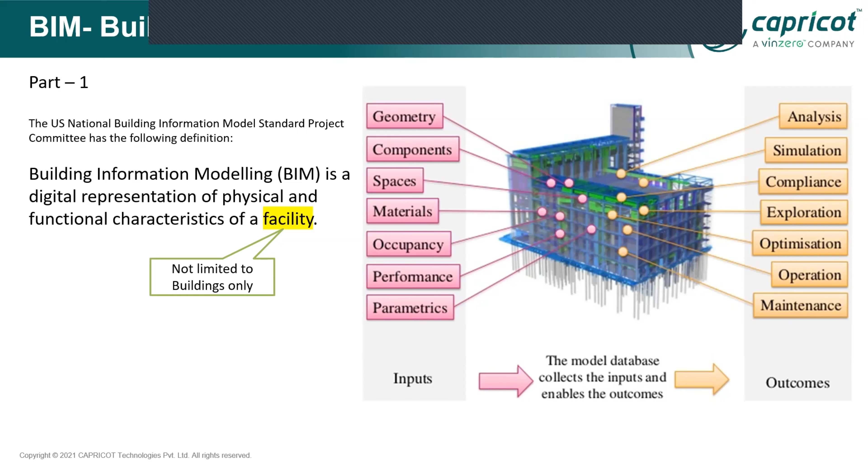Apart from that, I would like to have one more definition. BIM is a shared knowledge resource. We are not building any construction or simulating any construction - we're actually building the information, from the programming stage till the renovation and demolition stage. We are completely building the information.

So from the programming stage, whenever I'm in the idea generation stage, I'll get the information and simulate to create a conceptual design. Right now I have a conceptual design model, so when I go to detailed design, I require the conceptual design data.

In current industry, when you go to detailed design, let's suppose we have a conceptual design model ready with us. When you go and ask your seniors to share information, they share some old data, or they may lose it because they are collaborating using WhatsApp or Gmail or some other platform. There is no standard cloud model from where we can exchange the information.

If you are working in a BIM environment, you have a common cloud database from where, from concept to demolition, renovation, or operation and maintenance, everyone will be on the same pitch, on a connected pitch, so you can exchange information from start to end.

For example, at any point if you want to extract particular information, you can do so by comparing different version drawings. There is version control available in building information modeling. You can extract older version drawings and compare current version drawings with the conceptual design versions.

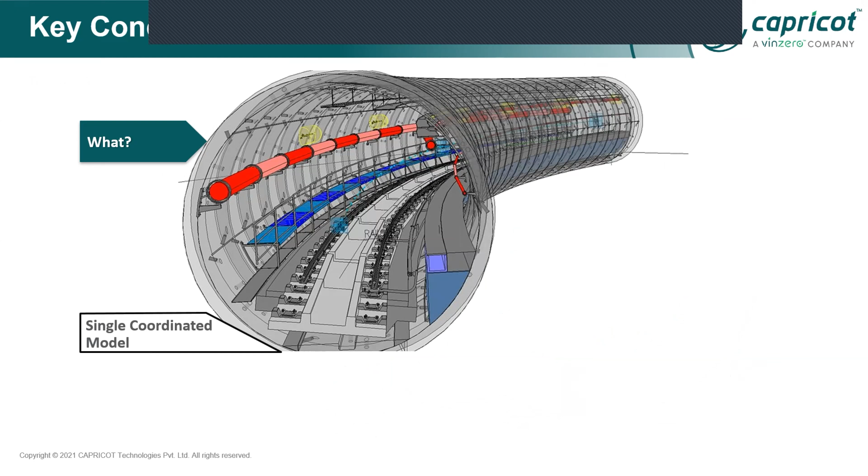It will allow multiple design firms to collaborate in a single source database. Who can collaborate? Designers, engineers, contractors, official people, or external consultants. Everyone can collaborate on a single coordinated model, because we have a single source database providing a single coordinated model.

So now we have a single coordinated model. A designer can work on that particular project, a contractor can also work on it, and a project management team can also work on that particular project.

If at any point a project management team faces an issue at the site, because we have a digital representation model ready with us, they can raise the issue to a designer. Now the designer, sitting in the office, can resolve that issue and publish the latest updated drawings to the site without using any paper, as we talk about sustainability factors. Without paper, I can do the work and collaborate in a cloud manner.

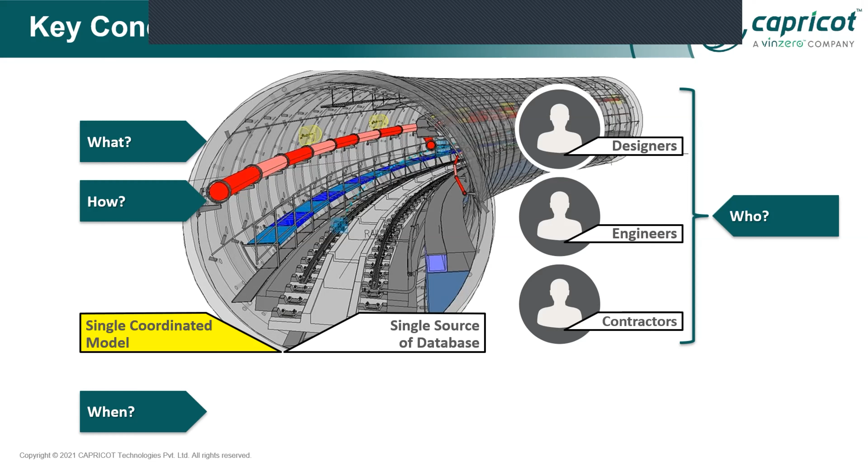So from where to where, or when does building information modeling help you? From concept design to construction and operation phase, we are on the same pitch. The entire building information model will help you achieve your organization's goals.

Apart from that, I've added a couple of snapshots to show you it's not only limited to buildings. Most organizations in India or in the world working on road transportation projects are using building information modeling.

If I take an example of products like InfraWorks and Civil 3D, those are BIM oriented tools which will help you achieve your BIM objectives. Apart from that, this can also be used for rail corridor projects.

And we have water infrastructure projects. I haven't added hydroelectric projects, but BIM can also be utilized there as well.

If you are from the hydroelectric background, using Revit, Civil 3D and InfraWorks, you can construct an entire digital representation of the hydroelectric project on your systems, and then finally publish your drawings to the field. That is also possible.

So I mean to say, BIM is not only limited to buildings. It can be used for any industry. If I want to brief you further, BIM is a concept where multiple organizations' people can work on a common data environment, represent a digital representation model, and fulfill their objectives, or BIM objectives.

So I hope I've covered enough about BIM. I'll skip to the agenda of the session. In this video demonstration, I'll switch to InfraWorks and show you the basic road design workflow for preliminary level. In this webinar, we'll focus more on preliminary design of road.

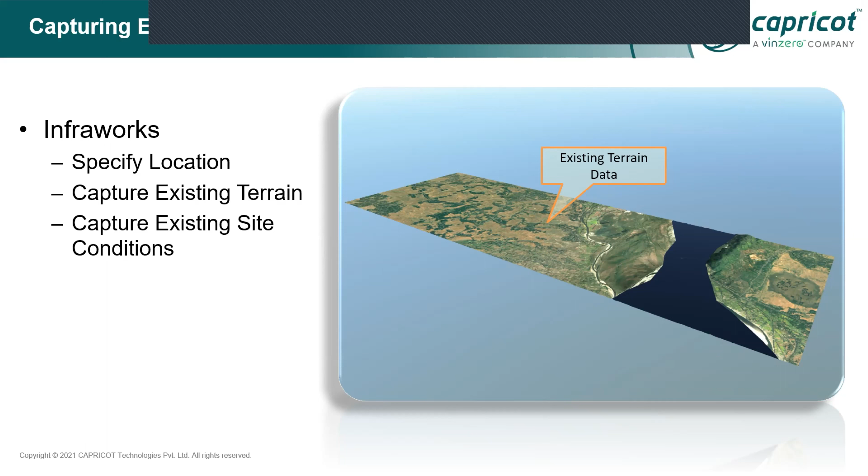In this particular picture on the right hand side, you can see I have captured one particular site with its existing terrain data. This data has been captured by InfraWorks from US satellite servers, with Autodesk having a direct integration with Microsoft Bing Map, capturing data from the US satellite servers. You get an entire 3D contour elevation data ready with you, overlaid with a Bing Map image.

Apart from that, we also get existing facility information like rivers or roads and alignments, captured from OpenStreetMap. Now we have contour data and existing facility data, so I can simulate, and the designer can work in a 3D environment and relate the information better. Due to the high level of resolution we have, I can work in an easier environment compared to 2D AutoCAD drawings or 2D Google Earth images.

I'll show you a live demonstration as well. We'll be talking more about data capturing and stuff. Apart from that, whatever information you have captured, you can extend to Civil 3D and do further modification on top of the terrain. For example, if I want to extract my contour map, or propose any surface, that can be done with the help of Civil 3D. We'll show you in this video demonstration how to exchange InfraWorks data to Civil 3D as well.

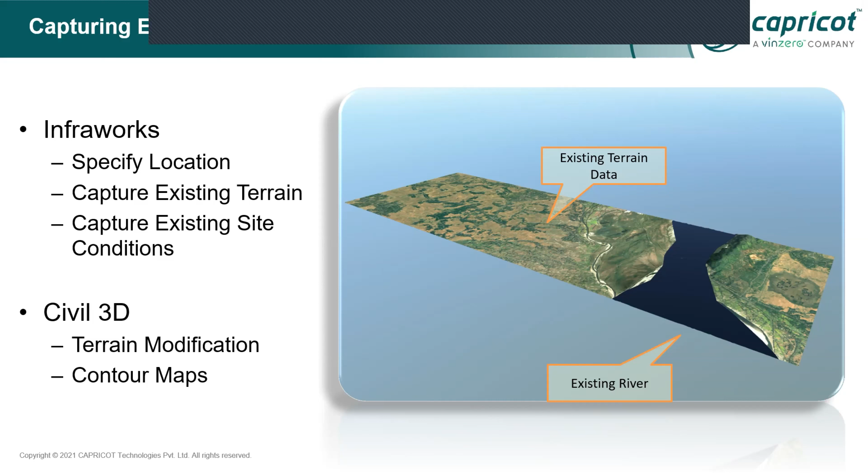So you can see in this picture, we try to capture an area which holds the existing road, and we have proposed a tunnel or railway tunnel, plus one more road tunnel for future traffic. Within InfraWorks, you can capture your existing road and rail conditions and information, and propose your road and rail layouts as well.

Once you're done with that, you can exchange complete information to Civil 3D for detailed assembly modeling, or extract quantities - quantity takeoff is also possible in InfraWorks, but you can do more detail in Civil 3D. If you want documentation like multiple cross sections or profile views, that can be done in Civil 3D in a very connected and dynamic manner. So once you are done with your complete model, you can exchange the complete information to Civil 3D as well.

Without wasting much time, I would like to switch to a live demonstration. I'll share my InfraWorks screen - just allow me a moment. I'll share my screen again. Yeah, I hope it's visible. I'll switch to InfraWorks now.

So this is the typical interface of InfraWorks. As I mentioned, InfraWorks is basically a conceptual oriented design software. On the top right corner - I won't go through the interface overview in detail.

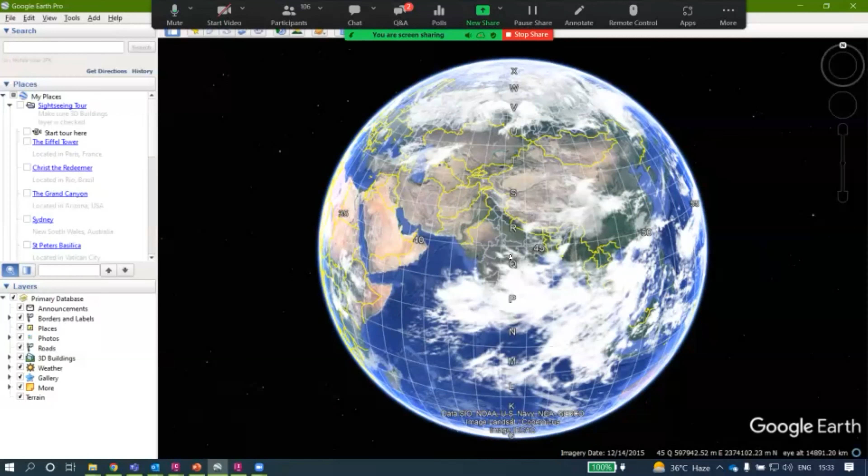Most of us refer to the UTM WGS 1984 coordinate system. In Google Earth you can see what UTM WGS 1984 actually is - we have a standard meridian, and according to that meridian the entire world has been divided into a number of grid pieces. Vertical grid lines are given a numerical value, and horizontal lines an alphabetical value. According to that we have 41, 42, 43, 44, 45, 46, and 47th strips.

India falls between the 42nd and 47th strip. So we are referring to UTM WGS 1984, and I'm concerned with which zone it's falling in - 42, 43, 44, 45, or 46 - that's something I'm defining there. Rather than using LL84 - which stands for latitude, longitude, UTM WGS 1984 datum - you can see this LL84 uses the WGS 84 datum. If you want to target any other particular country's standard coordinate system, you can click on none selected and specify the coordinate system you want to target.

As I mentioned, we have different types of zones as well. In Google Earth, you can see Navi Mumbai is somewhere over here - it was falling under the 43rd zone. So UTM WGS 1984, 43 zone, I need to define that. That is something available here as well - if you know the zone, you can define the zone directly.

If, like myself, I don't have Google Earth and I'm not sure where it was actually falling, I can specify LL84. When I specify LL84, it will target the UTM WGS 1984 coordinate system and it will use the zone as 43 north - the zone is calculated automatically. I'll select LL84, click OK, and now I'll click on create model.

When I click on create model, a model is going to be prepared in the cloud. You will get an email notification once it has been processed - it takes around 3 to 4 minutes depending on the project size and model size. Whoever has an Autodesk login will receive an email. Once your model has been processed it says success, your model has been created and is ready for use. You'll get this type of email, and your model will pop up on top of the InfraWorks screen, on the recent screen.

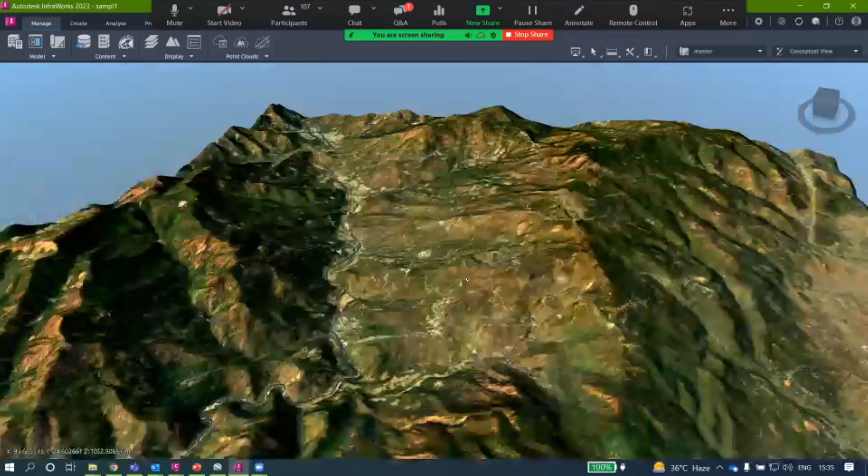Just to start, I'll open one of the sample projects I've captured. Rather than Navi Mumbai, I've also captured the Navi Mumbai site, but before that I want to open a hilly kind of area located somewhere in Manipur, just to show you the capabilities of InfraWorks. I'll open that now - you can see I tried to capture the area of Manipur, and I have complete hilly information here.

Compared to Google Earth, I have a more 3D based approach. You can see the hills that have been captured, the roads captured from OpenStreetMap, and the rivers, streets, and different types of features. I can capture and simulate the existing terrain conditions of that particular project location. If I switch from conceptual to engineering view, you can see the contour lines - I have many contour lines.

If I zoom into any region and hover over it, you can see the contour numerical value as well: 800, 900, 1000, 1100. When working in 2D base maps, you won't get this much information - you don't have this many contour lines, this kind of 3D approach. So at the preliminary design stage, I already have complete information ready to work with. This is more of a hilly region area - there's no population here, so it does not have any building representation.

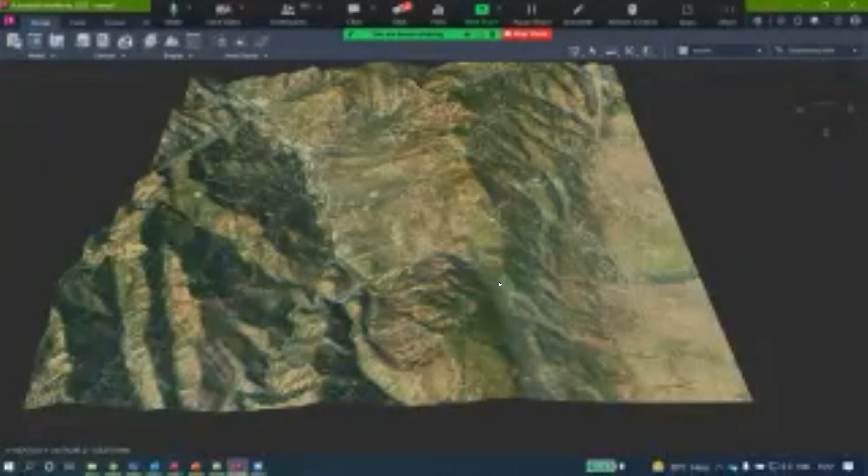If I switch to the Navi Mumbai project again, I'll open the Navi Mumbai area which we captured a few seconds ago. It will take a few seconds to open the model - it will try to render the area, process it, and show you the model. Now you can see I have captured the Navi Mumbai area region. It was taking a few seconds.

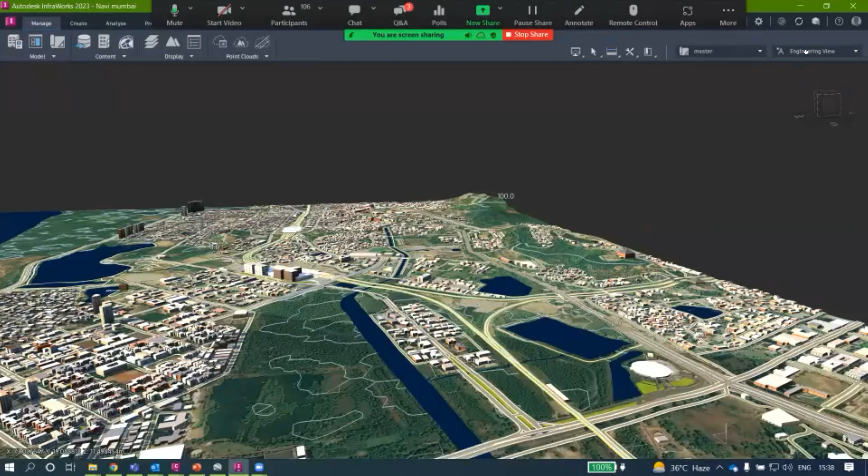Now you can see in that particular area we have different types of buildings. So the buildings have also been captured and simulated. This is the DTM data which we get from OpenStreetMaps and the Bing Map with the help of Bing Map. Now I have multiple road information as well.

If I zoom any one of the roads and hover my mouse cursor on top of it, it states it's Shankar Changu Kaha Thakur Marg road. I'll get the information from OpenStreetMap. Similarly, if I hover over any of the other roads, you can see it's a Palm Beach Marg road.

So you'll get that alignment information as well. When you exchange this entire data with Civil 3D, each alignment name is going to be assigned with the name of the road which we have. So basically these are the conceptual roads which have been simulated or constructed by InfraWorks.

So in InfraWorks, before starting preliminary design, we can perform a kind of site analysis. I want to understand the site terrain conditions first. For that, to do the site analysis within InfraWorks, we have surface analysis tools.

When I go to terrain themes, I can perform a quick elevation analysis, and I can perform a quick slope analysis. For example, if I go and perform a slope analysis, I'll switch to slope and specify the theme as slope analysis.

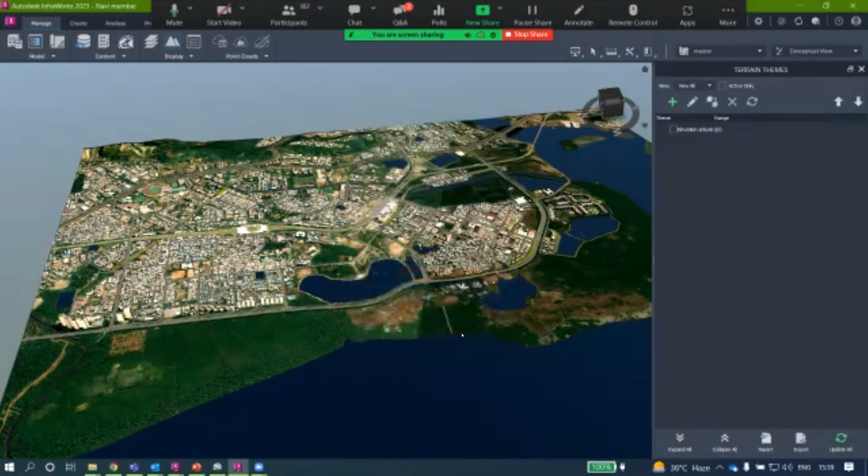You can divide the number of bands to understand the terrain conditions. I'll click OK. Now you can see most of the region falls under 0 to 15 meters of elevation. So it's more like a flat kind of region we have, but here we have a hill region, so that does make sense. It had 15 to 30 meter elevational differences.

Apart from that slope, I can also perform my elevation analysis. When I perform elevation analysis, you can see 0 to negative 25 to 4.83 near this beach area, which I've highlighted as the lowland area. And the yellow region is somewhere around 4.8 to 34.67 meters. That's how you can quickly perform different types of analysis and simulate the conditions on top of InfraWorks. But I'll turn the analysis off.

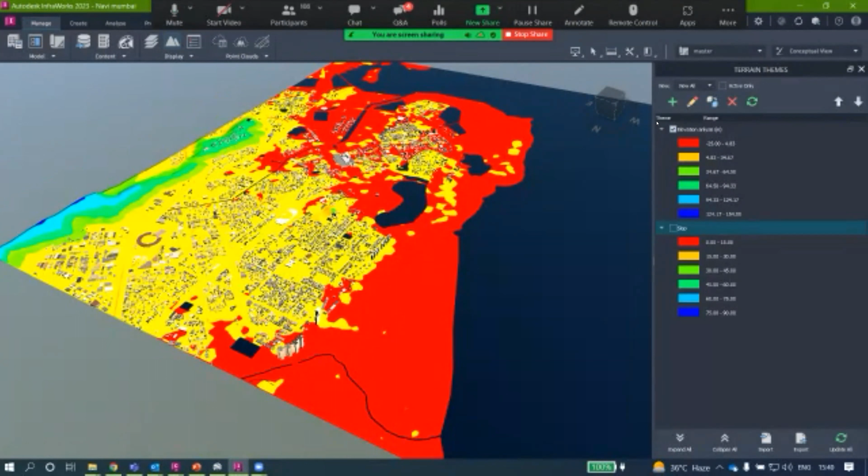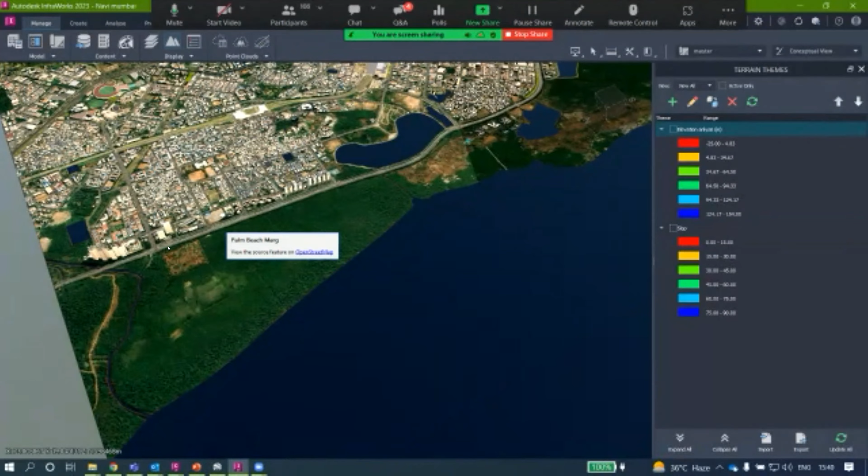Now I'll switch to the preliminary design of road workflow. Ideally it's not the workflow I'm doing, but I want to deliver the concept. So let's suppose I want to plan a road from this particular alignment to somewhere here. I want to connect it with the help of a bridge.

I'll do that. We can also use creation tools, we have multiple tools to draw those things. So unlike Google Earth, where we use a polygon or polyline and draft an alignment, what you can do here is use a planning road option, which will allow you to model a style-based road. So you are actually planning an alignment, but using styles like parameters.

Now you can see this is also a kind of planning road. We just need to define the point, and it will create a rule-based workflow. Over here it was using a two lane with sidewalk workflow, and that is for the finalization of your alignment only. Later you can convert that alignment road to a component road for detailed engineering analysis.

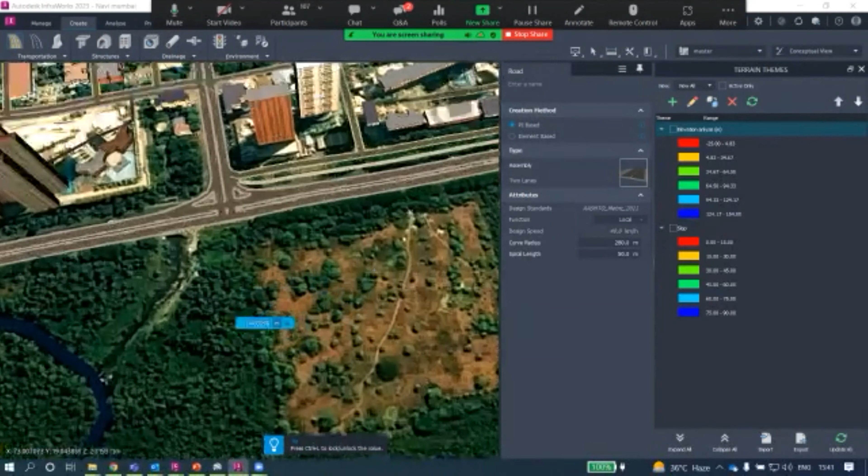Although I'm using my component road for now. For example, I want to start from somewhere here, I'll go all the way here, and here I want to attach a transition base curve, so I can attach that transition base curve.

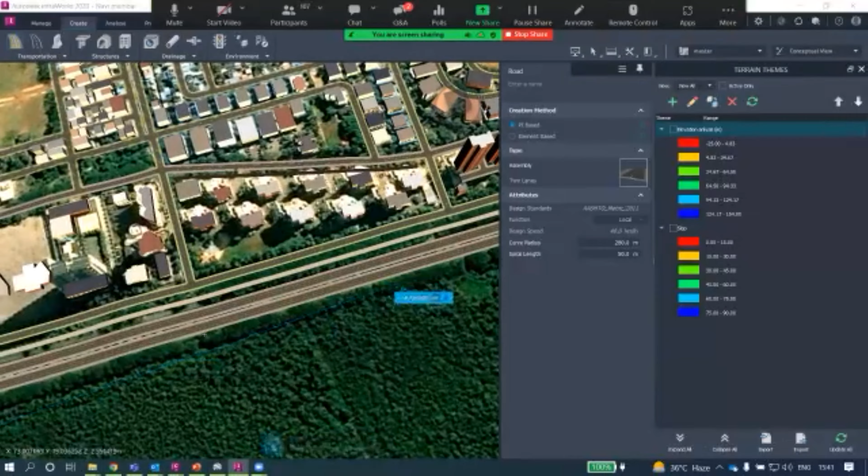Now this time I want to move till here probably, or maybe here, then from here to here I want to go. For this particular example I'm using two lane, although you can go and change the assembly later. If you want to work with any other assembly rather than a two lane assembly, like a four lane assembly, you can go and select the four lane assembly as well.

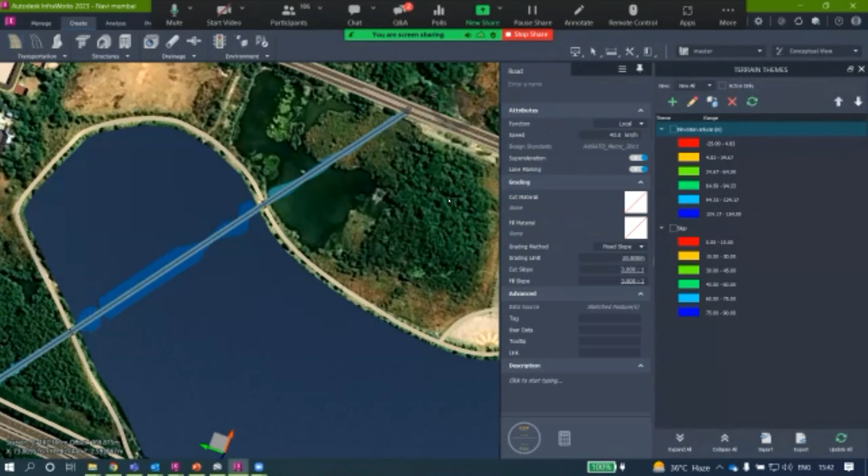So I'll define till somewhere here I want to draft. It was taking time to get the model updated. Now you can see a two-lane assembly has been laid out and drafted - you can see over there.

Now what I can do is select any of the road components and control my super elevation values and stuff. Apart from that, I can add different types of arrangements as well. For example, I want to update my profile view of this particular assembly.

Over here I have an option to check the profile view of this particular road. I can go to profile view and use my fit to screen option. Now you can turn on active tracking as well, and track it closely - you can see the area, right?

So you can actively track the area where you want to work on. Now you can see this is the elevation region I am working on, so I can zoom to the nearest PVI point and update the elevation values where I want to update this particular region.

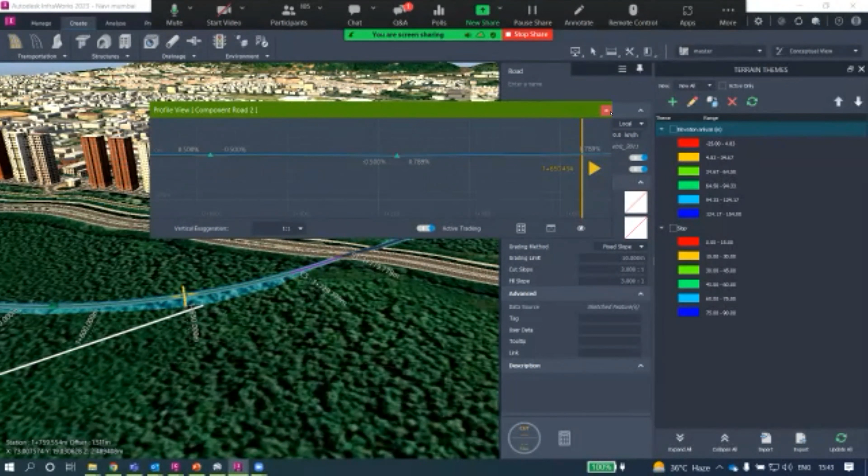Or else, you can exchange the information to Civil 3D. I'm more familiar with and more optimistic about using Civil 3D's profile creation tools, so I can exchange the entire information once my planning level has been done. I can exchange the information to Civil 3D, update it, and create my profile view over there.

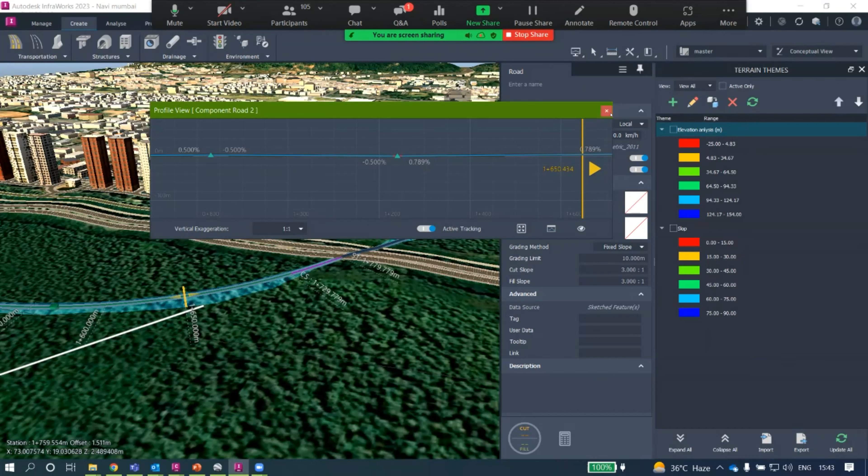So it's up to you how you want to work on - either of the ways you can work on. As of now, I'll close this tool and switch to another view.

I have created multiple themes as of now due to time constraints. I have already created a road with a bridge assigned to it - you can see I have created one particular bridge, a road with a bridge.

To add the bridge, we have an option to add a bridge. You can select that option and select a start station and end station where you want to attach your bridge structure. One more thing I want to show you in this webinar session.

Whenever we are using a planning road or component road, wherever we start, InfraWorks is smart enough and will create the intersections automatically. We don't need to worry about creating intersections - that is something InfraWorks will take care of for you.

Now I have a two-lane road created with me. I'll zoom to one of this particular region. Now you can see one bridge structure has been added, but I want to update the structure of a pier orientation. For that, I'll go and select one of the piers I want to update.

I can either use this drag and drop option or update the value as well. As of now I want to use my realistic approach - I'll drag this pier to somewhere here. Now, two ways: I can either give a skew angle to control the assembly, or use this rotation option to update my angle of rotation of that particular substructure. Now you can see the assembly has been created along the way.

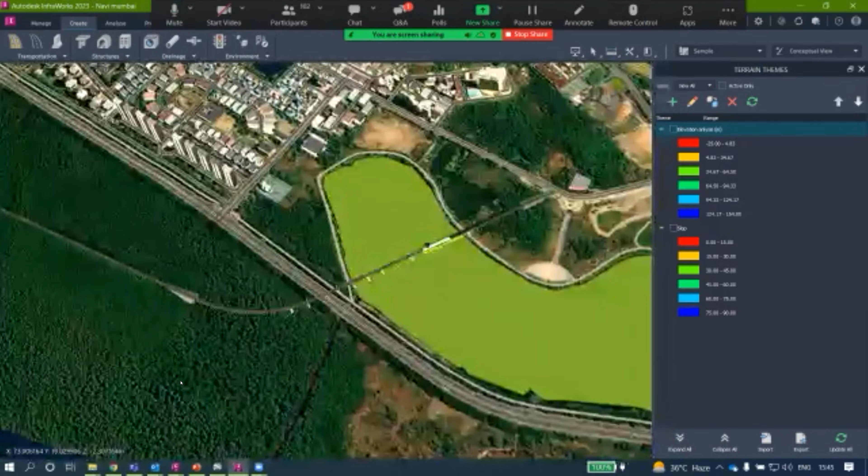To here. Also, apart from this, I can add different types of decorations to it. If I select any of the road components, I can do a right click, and there is an option to add decorations.

I'll use my place decoration option. Let's suppose I want to add my bridge barrier - I'll search my barriers, or I should search for bridge. Yeah, red railing I want to use, and I want to place it all the way to here.

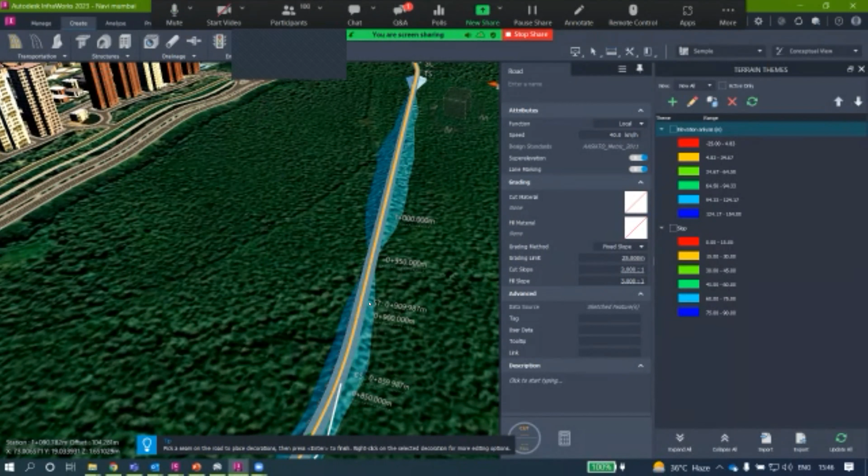I'll close this - now you can see that assembly has been placed along the road. I'll zoom this out - now you can see, right? If I select any of the decoration in the property palette, I can adjust the spacing as well. For instance, I want to have these particular barriers along the 4 meters width, so I'll update the value.

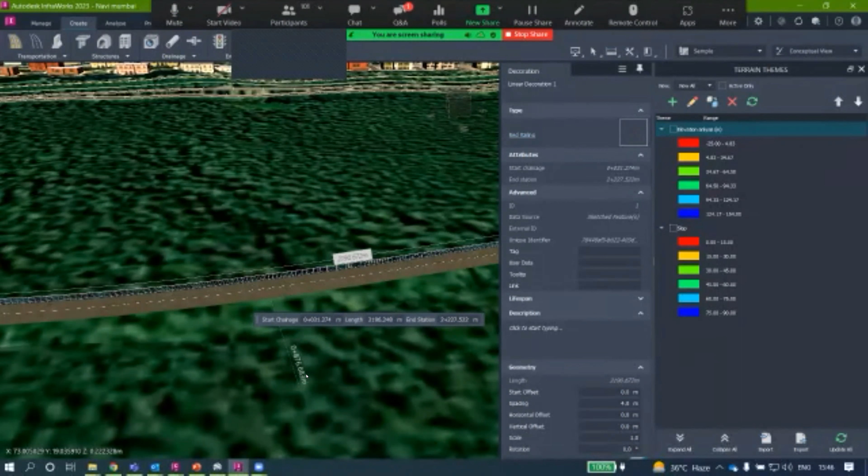So the same way you can attach different types of assemblies, roads, and different types of road components as well. In order to insert a road component, there is an option to insert road component - you can go insert any of the road components if you want to do so.

As of now, I want to plan for a two-lane road only, so I have attached a two-lane corridor with a railing. I'll switch to the other theme. I have the complete model. Due to time constraints, I have already created the things. Now you can see this is the final output which I have created. I have a railing, I have cut data, and I have side grading options as well.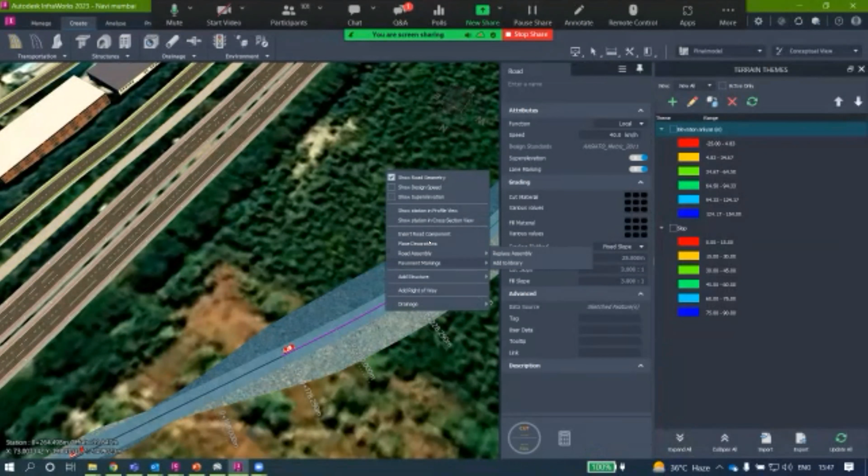If I select any of the road view and do a right click, there is an option to check the cross section views as well. So I'll go to cross section views.

Now you can see there are multiple dots, three dots. If I switch to the very first dot, it will show you the cut fill data, how your cross section is simulating with respect to existing ground. If I switch to another view, it is more like a super elevation kind of thing. According to super elevation, wherever your super elevation was existing, it will update accordingly.

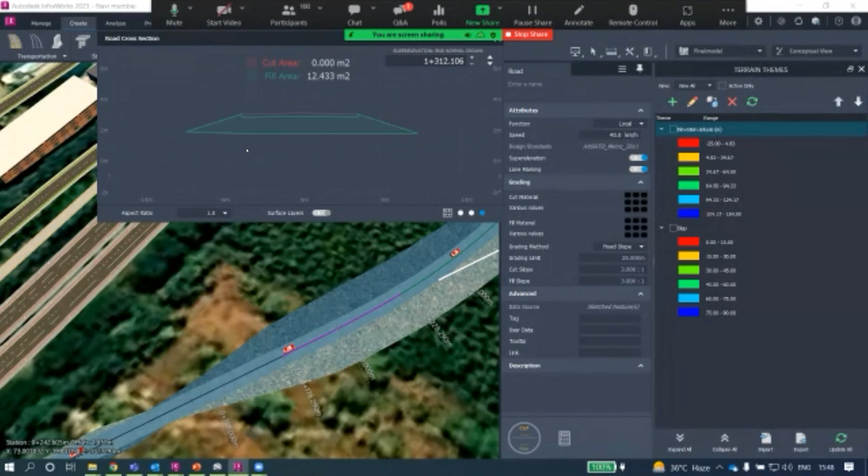At the end, we have cut fill data along the cut area, and with reference to chainage value, it will calculate and simulate your cut fill cross sections, proposed cross sections. So here we are in a cut. When I move to another chainage, we are in a fill stage. So these are the different types of cross sections which you can extract.

Apart from that, within InfraWorks, you can even compute your preliminary level of quantities. For that part, I'll select any of the road components. When I select any of the road component, on the bottom right corner, we have a cut fill option to compute quantity takeoff. In InfraWorks, it's very easy to compute the volumes.

So when I click cut and fill data, it will actually compute the volume of cut fill data. When I click this play symbol, now you can see it was computing the value. So there are two options: either you can specify the chainage, like where you want to extract the quantities, or else you can turn this off, and if I want to extract the complete volume data, I can define the chainage range.

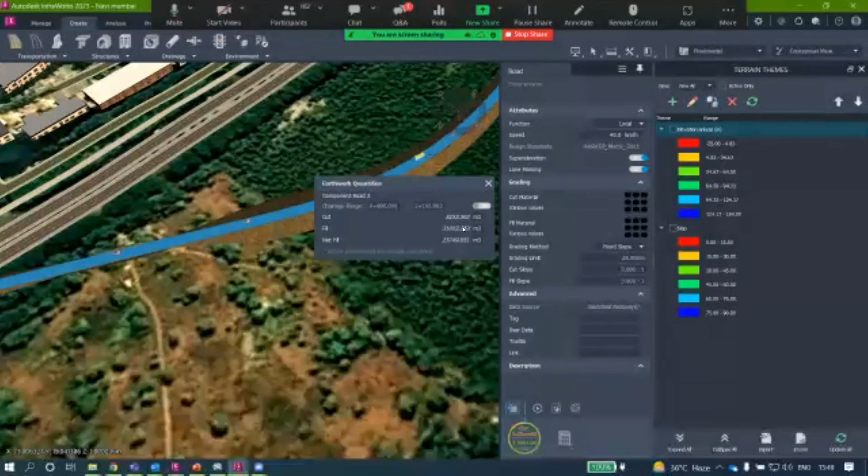We need to perform 5253 cubic meters of cut, and I need to perform 31,003.353 cubic meters of fill. And net fill has been also calculated.

Similarly, if you want this data in a CSV file format, there is an option to extract a report as well. For an instance, I'll save this here only. I'll save this, and I'll open that for you.

If I open this Excel file, now you can see with reference to chainage, your cut data, cut fill data, and fill data, fill area, cumulative cut data, cumulative fill data has been calculated and extracted in the form of CSV.

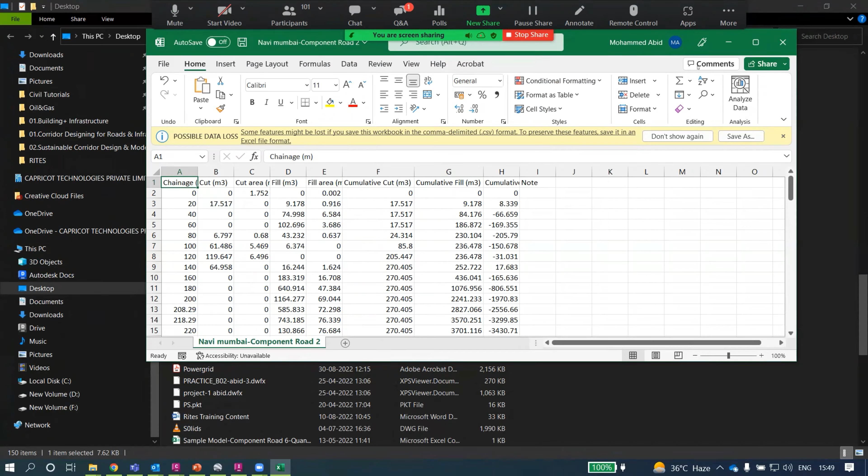Same way, you can even compute your materials as well. There is an option to compute material. When I click this calculator symbol, it will compute the quantity of the entire structure, including the superstructure which we have added. So we have added a bridge, and the bridge quantity has been computed. Now you can see the total superstructure requires 1568.920 cubic meters of precast concrete pouring, and we have this much of filling.

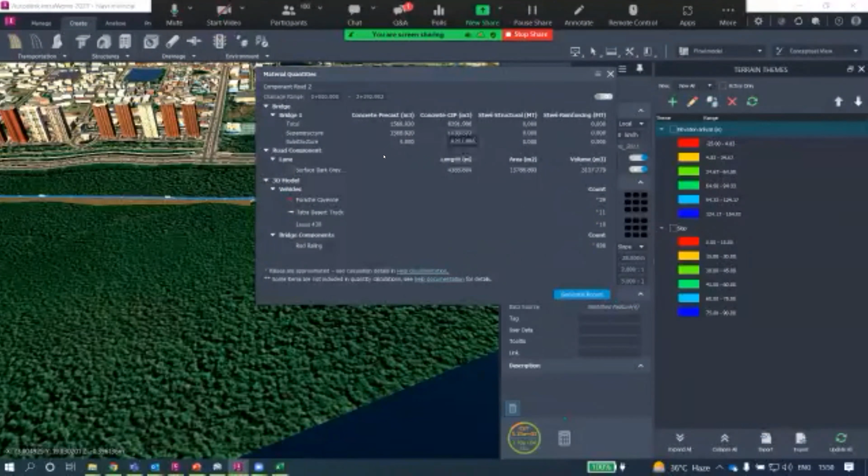So in a similar way, it also computes the layer requirement quantities. Like we have 4385.804 meters length of road, and it requires 3157.779 cubic meters of volume.

So it also counts the components. For example, if you have placed street lights, it will also compute the number of street lights. As of now, I've placed railings of 4 meter and 1.5 meter width, and it has computed the total count, so it required 938 number of railings.

So if you want to generate a report, you can directly click over here. You can generate a report as well. If I click save, it will also generate an Excel sheet of CSV data you can extract. I'll save this file. Click yes.

So I'll go to desktop again, and I'll search for that particular file just to show you. I'll open it, yeah, Road 2 quantities.

Right, you can see the approximate data which has been calculated. So for a preliminary level of analysis, you can use this information to further design, right?

Later, once you're done with your preliminary design, for the documentation part, we can exchange the complete information to Civil 3D. In order to share the information to Civil 3D, within InfraWorks we have the share option on the top left corner.

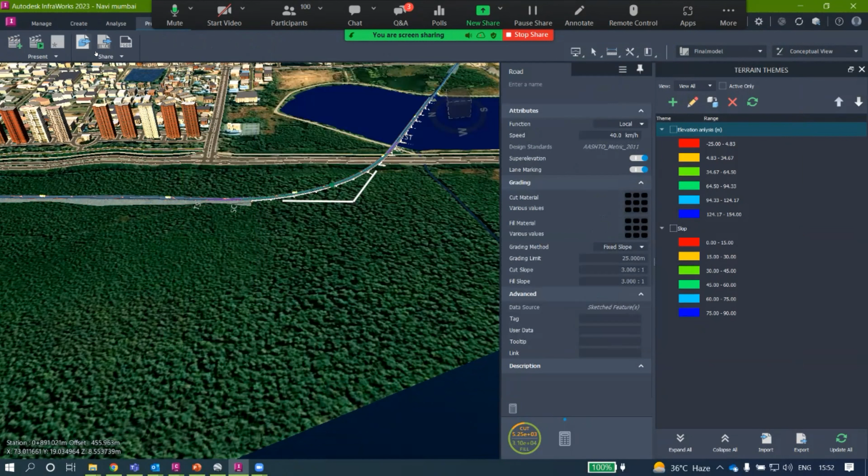I can either export this model as an IMX, or I can directly open that InfraWorks model in Civil 3D as well. For this particular demonstration, I'm using IMX file format, so I'll export that IMX file format using the entire model option.

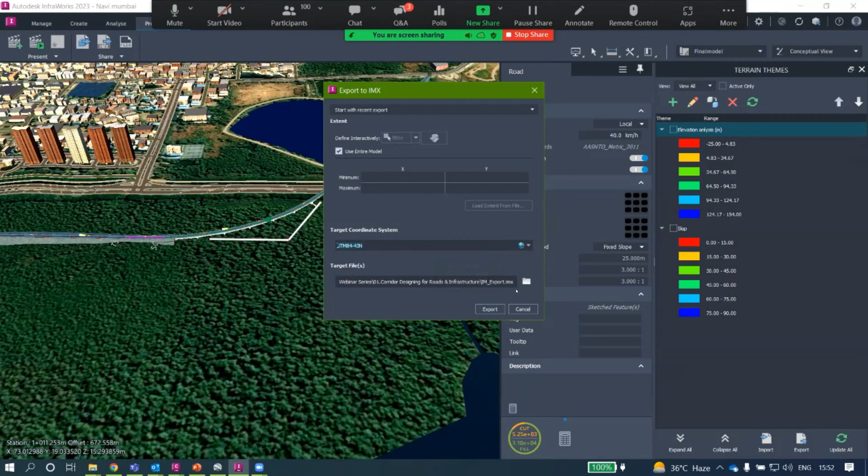Now you can see the coordinate zone. I have used LL84, but by default, the target coordinate system has been calculated by InfraWorks itself. I am targeting UTM 84, and this area is going to be falling under 43 North. Now you can export an IMX file format, and that file format you can import in Civil 3D.

I'll switch back to Civil 3D. Within Civil 3D, we have the InfraWorks tab on the top right corner. When I switch to the InfraWorks tab, I have an option to import InfraWorks data to Civil 3D. So either of the way, I can open a model.

I can click on open model. I can specify the InfraWorks model where it has been saved, or else, if you remember, I just tried to extract an IMX file format. That IMX format can also be imported to Civil 3D.

You can click on import IMX. You can select that particular assembly, the IMX file which you want to import. I've imported IMX data in Civil 3D. Now you can see this is the different data which has been captured.

Even I'll turn on the map location just to show you. If I turn the map aerial on, the background map image is going to be turned on. The same image which we are seeing in InfraWorks is going to pop up on Civil 3D as well. So with the help of Civil 3D, I tried to create the profile view of the proposed roadway.

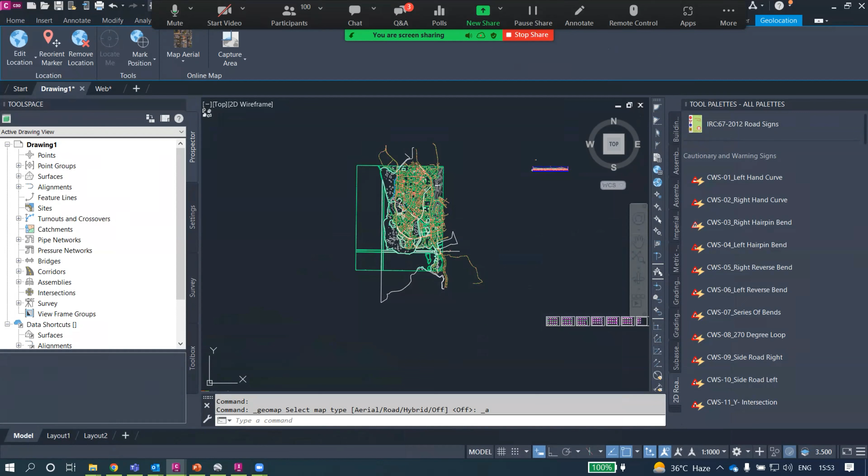Now you can see on the top right corner, just allow me... yeah, the same image has popped up, right? I'll turn the map off.

Now on the top right corner, we have a profile view created. You can do the documentation. I tried to add different types of bands like vertical geometry, horizontal geometry, cut fill data of that particular area, and I did try hatching as well.

This red line represents my existing ground, and the blue line represents my finished ground level. According to that, I did my cut fill hatching as well. So this is the hatching which I have performed.

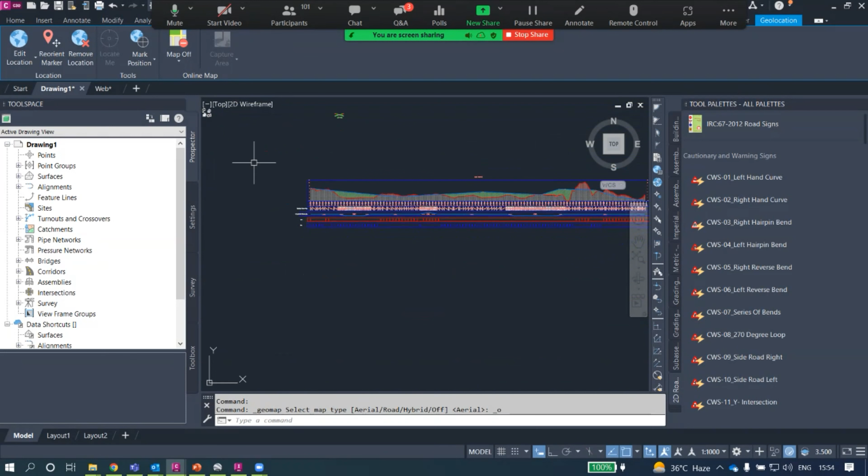So different types of documentation are going to be done on Civil 3D only. You can exchange the information to Civil 3D, and attach different types of profile views and cross section views. It's very easy to do the documentation in Civil 3D.

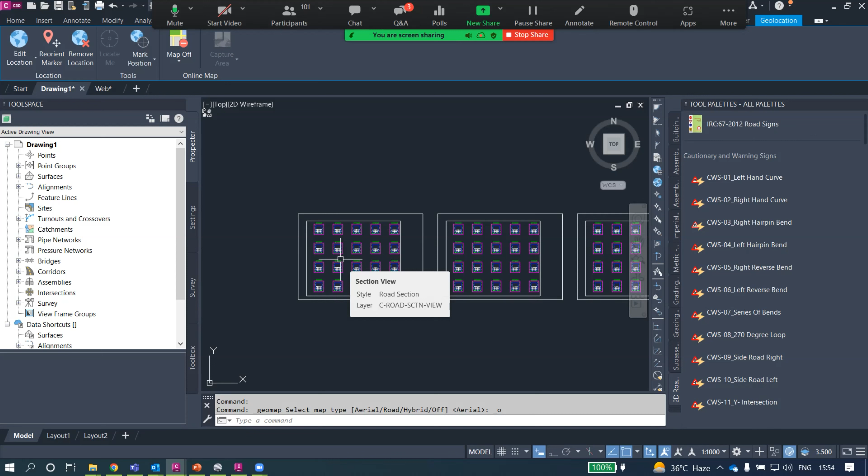Although we are not covering the documentation parts for this particular webinar, we may plan one more webinar series for the detailed design on Civil 3D. Apart from that, I would like to focus on one more small topic.

Okay, I'll switch to manage. In this particular webinar, I want to focus on one more small tool, one of the good tools I should say, Dynamo. Dynamo is basically a visual programming tool which will allow the user to automate the workflow. With the help of Dynamo, I can automate repetitive tasks.

For instance, I have modeled an entire alignment. I want to place traffic signals along the way. I'll click on Dynamo. I have created a small script to automate that particular task. I'll click on Dynamo to open the script area.

So non-programmers like myself can build a logic in Dynamo and automate repetitive tasks with the help of Dynamo. I'll open this particular script, the signboard placement script. I have this particular Dynamo script ready with me. So here, what I'm trying to do is capture the information from the Excel sheet which I have.

I'll just show you as well. I think it's available somewhere here. Yeah, I'll just open that particular Excel sheet as well.

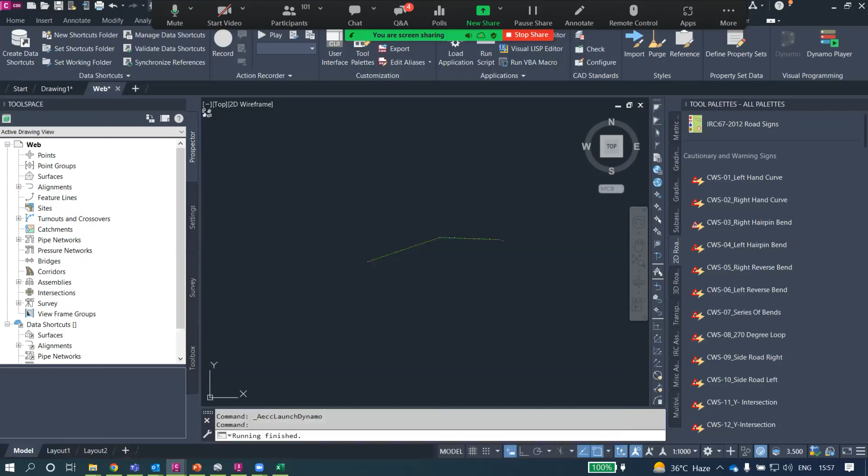I can place that. I have created my sample script. I can even control my angle of rotation, and I can control the size of that particular block. If I run that particular script, now you can see that Excel sheet has been opened. If I minimize this screen and zoom to alignment, you can see that a chainage block has been placed automatically.

With the help of Dynamo, you can repeat it. You can automate the repetitive task as well. So for instance, I'll go to Dynamo screen again.

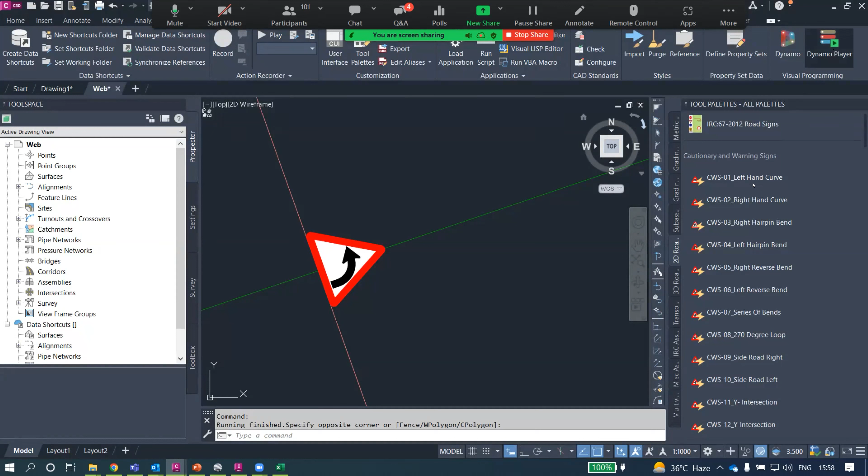Rather than using Dynamo, I can also use my Dynamo Player. I'll launch my Dynamo player to run the same script. I don't even need to launch Dynamo again and again. I can use my Dynamo player to run the same script. If I open this input value, the edit input option, I will get the same input information in Dynamo player as well.

Now I can control the offset value, the alignment value, and the chainage value as well. For instance, I want to increase the block scale to 2, and I want to place a signboard around 50-meter offset. When I specify that value and run this particular script, that signboard is going to be placed automatically.

So it has been run twice, because one time I ran it with the Dynamo script, and another time I'm running with the Dynamo player. That makes sense, it will place again. So if I want to increase my block scale value to 5, I can run it again, and the size of the block is going to be increased automatically. So with the help of Dynamo, I can automate repetitive tasks which I have.

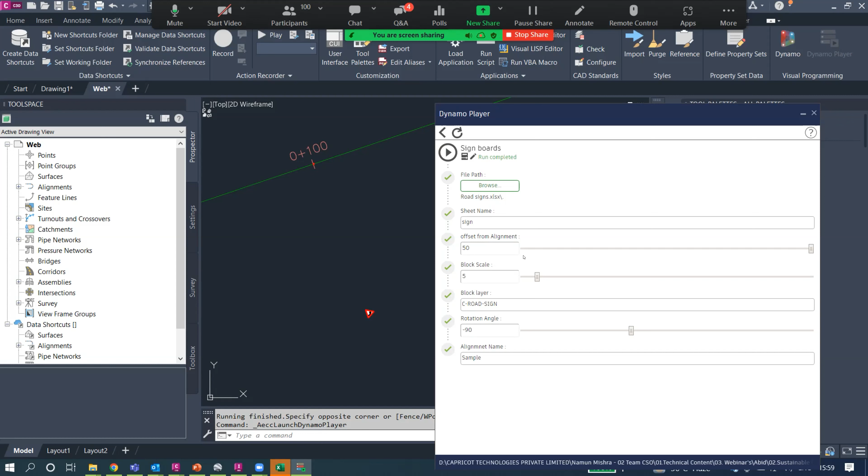I can then further exchange the information with InfraWorks for storyboard creation and stuff. I hope...

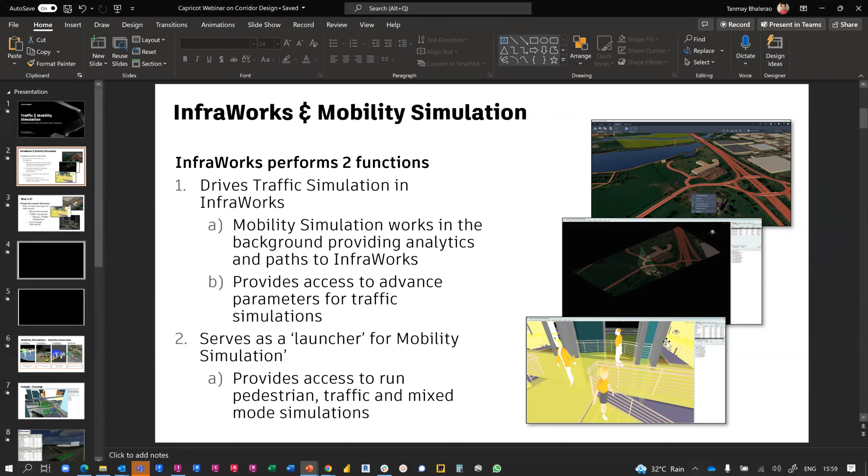That's the idea of why we want to do these kinds of simulations, or why they are beneficial. Just to give you a quick glimpse of how it all looks like—I explained the first one, traffic simulation, the second one, people simulation, and then the third one being a combination of both, of people getting into cars or stations and all of that.

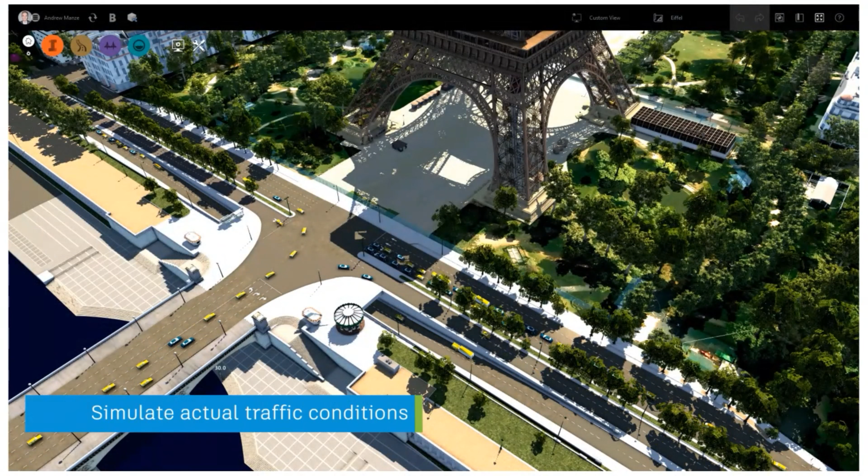This is live screen capture of InfraWorks. This is the simulation end result that you can expect to see from InfraWorks. So you can imagine such powerful visualizations can really help with design approvals as well.

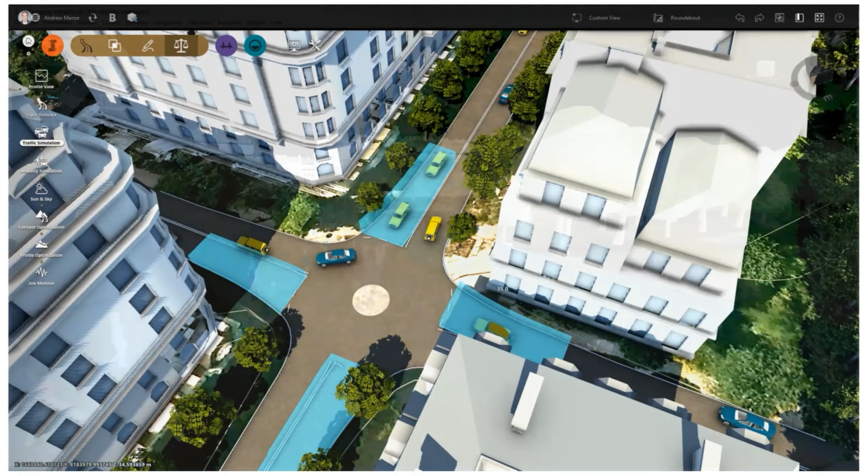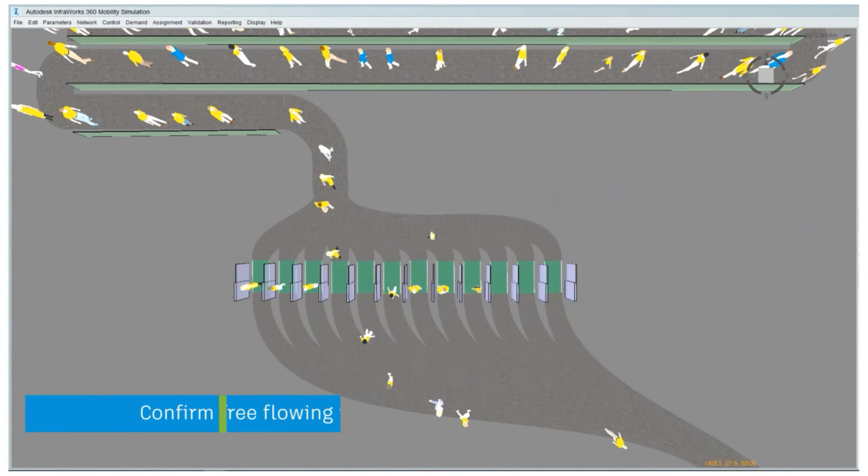And that's the queue time, and we'll get into details about this. I'll show it live to you as well. So you can set a threshold beyond which the queue times turn red instead of being highlighted in blue. And then you can simulate the movement of people across a facility, across an airport, through different types of facilities, for you to understand the bottlenecks, understand the footfall, design the kiosks for the people's movement across that station. And not only that, but time it based on the schedule of the train that is anticipated.

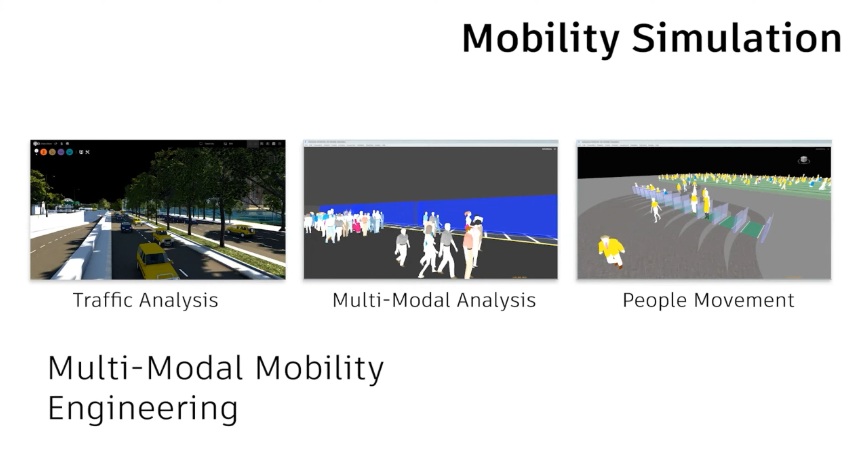So therefore, this is the missing connection between—as we think about smart cities, as we think about moving towards public transportation, the future of public transportation is that all different modes of public transportation can be synced to ensure no crowding or no bottlenecks in where people will end up gathering and creating delays or chaos at a particular facility. So that's the end goal of giving you access to such a powerful simulation tool.

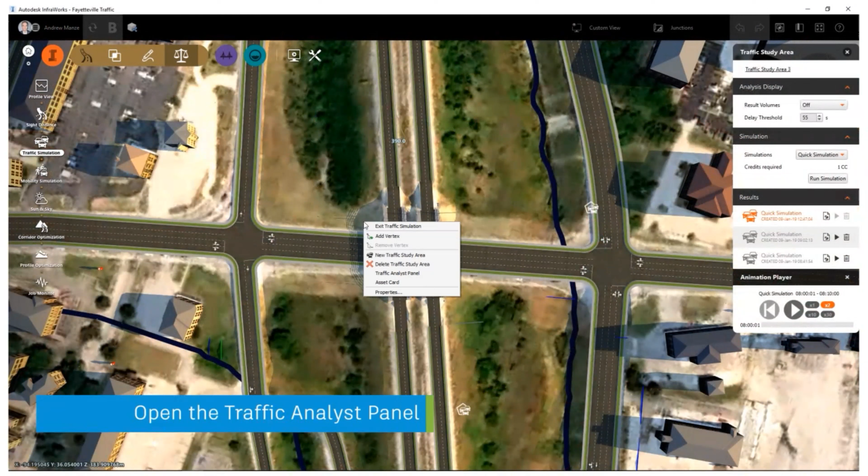Those vehicles can be entered. So the way it works is for every lane and every approach road, there's a lane, and then each lane is like a demand zone, right? So from each lane, you have to specify the demand or the traffic that is flowing to every other lane. That's what we call the demand matrix.

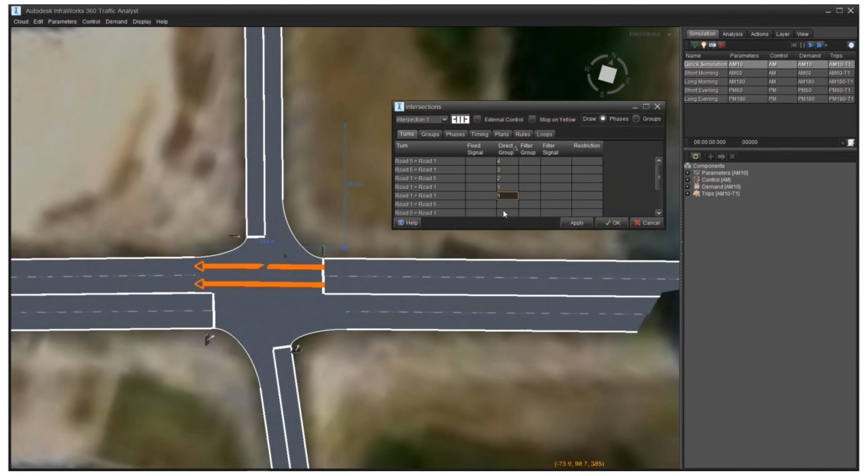And this is usually done today all in Excel, or maybe some other tool. But most people are not yet aware that this is available from within InfraWorks. Even such powerful analysis tools are available and very easy to use. That's the beauty of it. Just by entering that demand matrix—typically you would just do that in an Excel table—so just copy pasting that into InfraWorks, you're able to quickly generate a simulation like this.

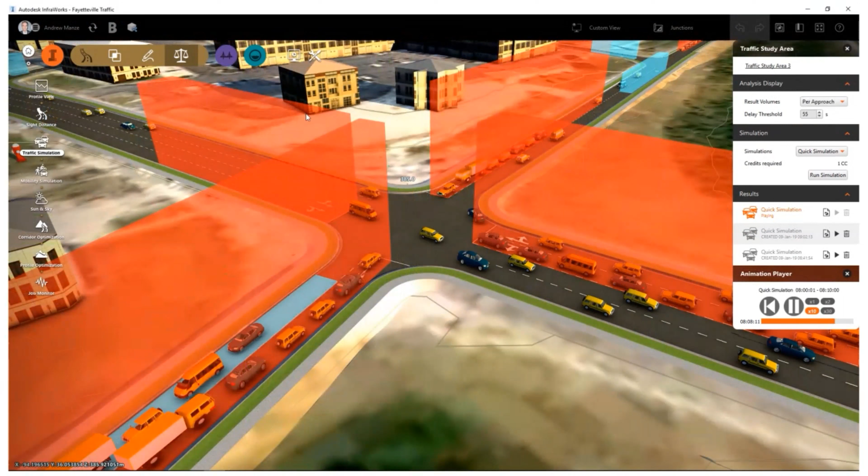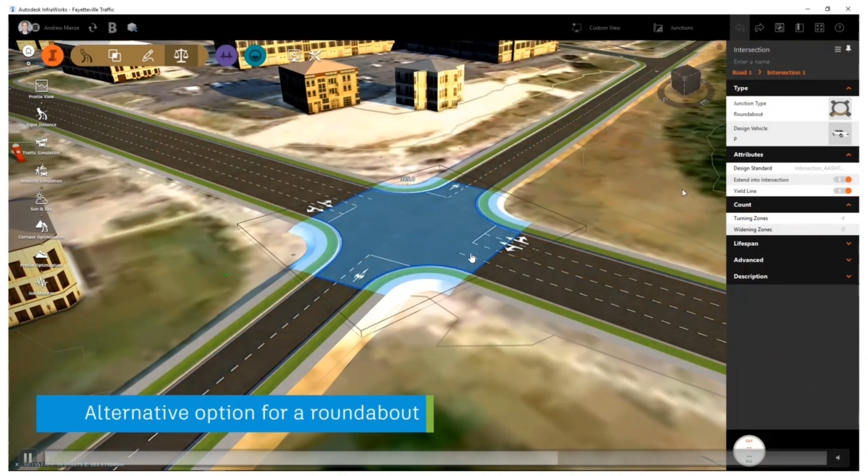But the end goal of the simulation is not just a cool visualization, although the visualization also helps a lot for design approvals, for validating all the designs. The end goal is this, for you to understand the queue time. So now here you can see that there's an average delay of 72 seconds. A 46-meter long queue is getting formed. So you can set a threshold that you want to ensure the queue stays below a particular point.

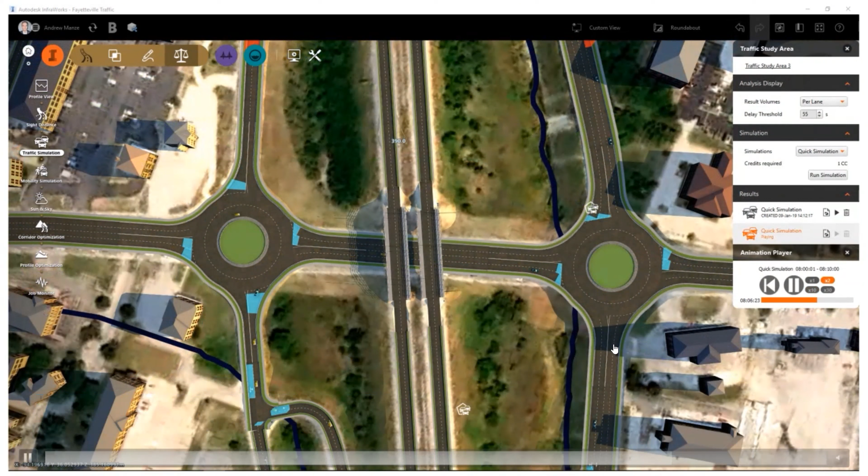And now, as you saw the junction, when we change the junction into a roundabout, that particular intersection, we are suddenly able to change, and the queue time has dropped down substantially, and the color has also changed based on the threshold that we have specified. So that's the power, and that's the kind of things we wanted to showcase to you, to make you think about your projects and think about the designs for your corridors, whether they are sufficient for the next 10-20-year demand, because traffic is a huge problem in India, and more and more city planners are solving for this particular issue.

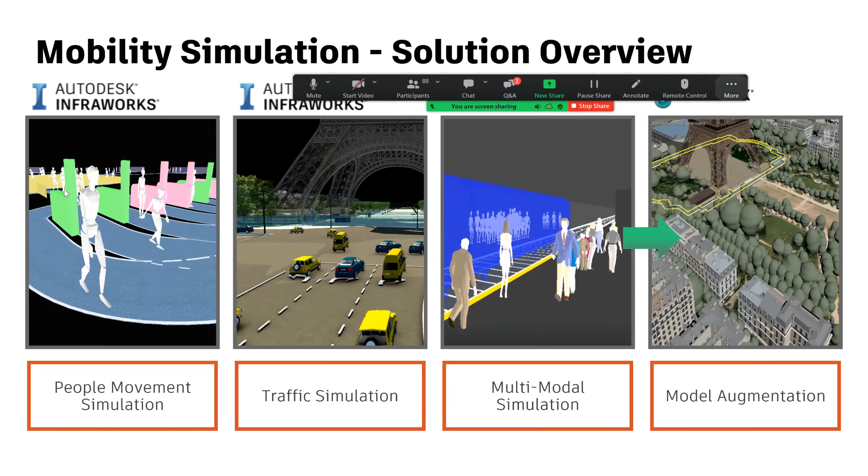Okay, escape has finally worked. Now I'll directly jump into InfraWorks.

One question from the audience was about InfraWorks Model Builder: what is the maximum extent? I think the area you can draw is up to 200 square kilometers. That's the extent of the area you can take. The moment you exceed that, you can see it turning red.

The question was whether we can bring in our own site boundary. Yes, you can import your geolocated polygon as well.

The other question was, if we take an area as big as 200 square kilometers, what's the file size going to be? So that's what I did. This South Bombay extraction is something I've done just now. If we wanted to see that, we simply go to the InfraWorks models. These are all the models that get created, and depending on how big their areas are, you're able to quickly understand their file sizes.

So it's only 158 megabytes for the 200 square kilometer area. It's a very light file, and that's what makes it so easy to browse and work in that particular model.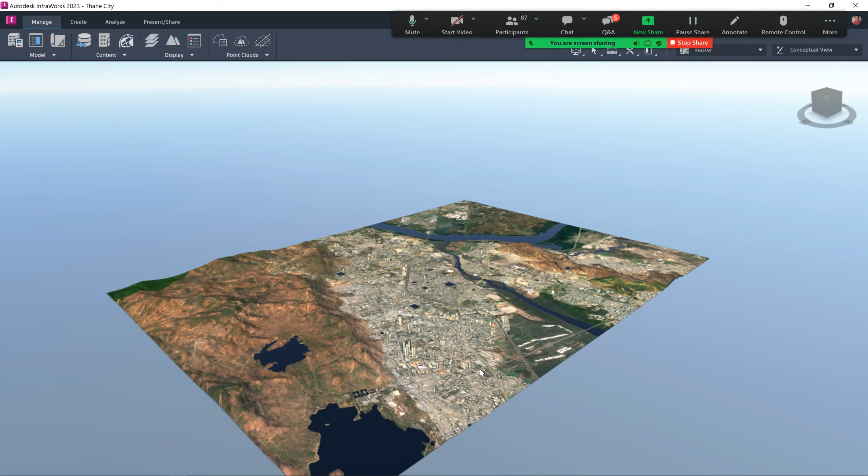So let me go back to a particular model to quickly showcase mobility simulation as well. I know we have to leave some time for question and answers, so just bear with me for a moment.

Yeah, so again, we're back to the InfraWorks environment. As Abid was explaining, here is where you can create all your infrastructure, and here is where you can manage all the different data sources. You can bring in all sorts of file formats into this particular base map or base 3D city model. And then finally, we have the Analyze tab.

This is the most powerful tab that helps us validate all of our design. There's a whole bunch of things you can do here. You can run profile optimization—let's say if I'm designing a road, you can optimize the entire design, the profile of that road, for minimal cut and fill. You can also optimize a corridor horizontal alignment from point A to point B to ensure the right of way is the lowest.

And similarly, we have traffic simulation, which is going to be our focus. The moment I click on traffic simulation, you can see I already have a study area given here. But even if I were to delete this traffic study area and start over, I simply go over to traffic simulation, and for whichever roads I have the demand or traffic data for, or my new project that I am designing, I just sketch out that area.

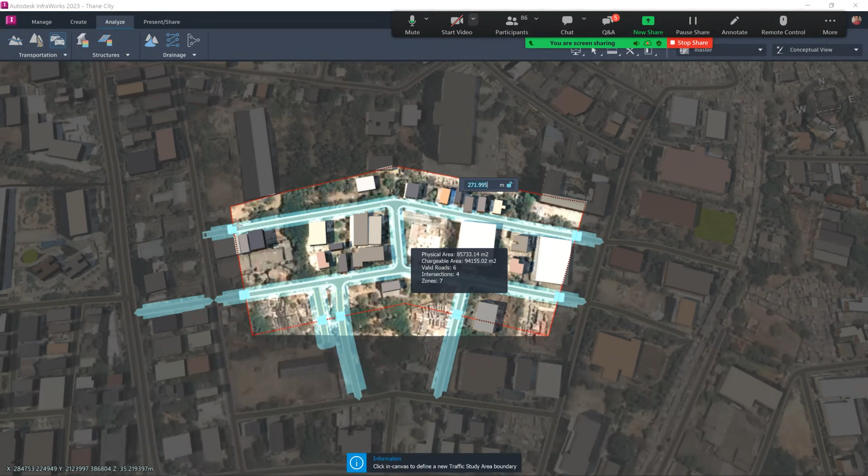Notice what's happening here: there's this blue box where whenever I'm crossing a road, it's automatically placing a demand zone at that area. Usually when someone tries to do this from scratch, they have to model these links—all the roads and all the demand zones—first, before they can start entering data to run the simulation. But you can see that is automated for us.

Now, this is the beauty of the software, where it's a simple point-and-click approach where you can intuitively figure out and do complex simulations very quickly. So I can just say, for now, I just want to see per lane what the queue times are that are forming, and my delay threshold is, let's say, 15 seconds. Fine, that's all right with me.

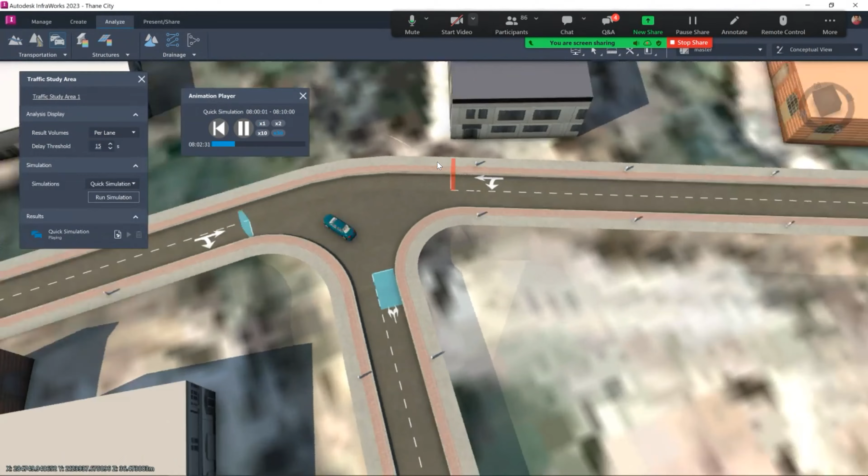So the moment I do that, if I just zoom in, you saw me, right? It was just a matter of 5 or 6 clicks, and we've reached this level already.

If I hover over a demand zone, this is zone 1, demand in is 10, demand out is 10. This is zone 3, demand in is 10, demand out is 10. These are the default values.

At each of these junctions, I can hover over and quickly understand. If I just play the simulation again, I can see what queue times are forming, and I can export out a report. So this is just to get started.

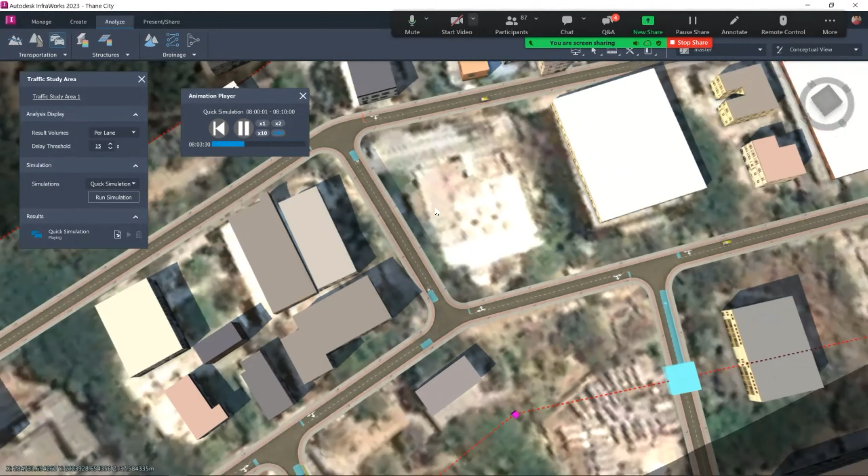But now, if you want to take things to the next level, and if you want to add your own demand data, create your own demand matrix, what you have to do is simply go over to the traffic analyst panel.

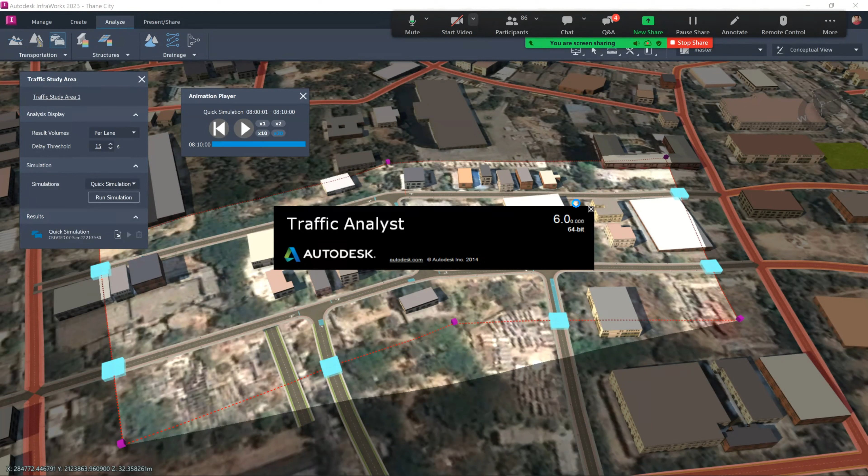It'll give you some warning signs saying this is advanced parameters, are you sure you want to get into this, because it opens up a new window. It gives you a whole host of options, and this is something used by people who do in-depth traffic studies as well. But there's no need to get scared or overwhelmed by something like this, because it's fairly simple to understand. Today, in the next few minutes, you'll get some idea of how to get started.

So I'll keep this window to the left, and there will be another window that I'll keep to the right. You can see this area, the links and the nodes or junctions have already been created for us. These squares are the demand zones, and we are in quick simulation.

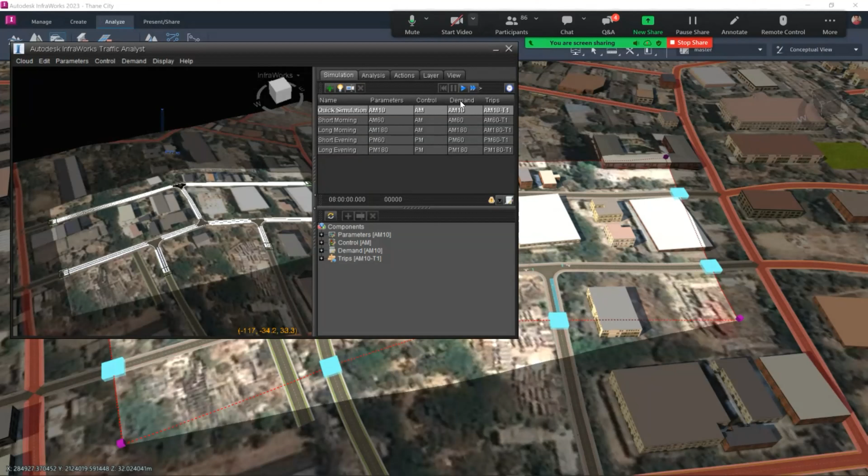Now this quick simulation is running based on what? The parameters that we've specified, the control of the junctions, the demands that we've just specified, the demand matrix of how many vehicles go from this lane to that lane, and the total number of trips generated for each vehicle. So these are the parameters that make up this simulation.

Right now, we will only look at one of the parameters, which is demand. You can set different demand parameters, and then quickly change it and run a different simulation. So this is how easy it gets, within a matter of few minutes once you've set everything up, to simulate your designs across all these scenarios for short morning routines, long morning peak hours, or whatever it may be.

So now, for all of this, you can see the same kind of tabs over here. You have parameters, control, demand, and the demand is what generates the trips. So in demand, I will go to the demands here, and you can see this is the matrix.

You see all of them are 10. These are the default values that InfraWorks takes for each of the lanes. Now what we can do is, let's say somebody has given us access to the latest data for that region. Now we have access to different types of vehicles, and we want to enter that data.

We create a new matrix, and whenever I click on any of these lanes, let me show it to you. So in matrix 1, when I'm clicking on zone 1, you can see this is our zone 1, and zone 1 going to zone 1 is 0, of course, because the car can't just go to the zone that it came from. So zone 1 will go to 2, 3, 4, and 5.

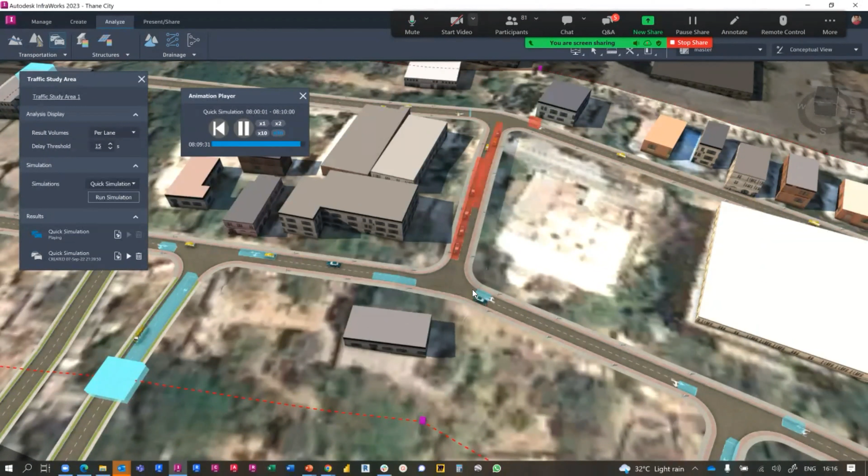Which are typically required. But now in this case, if we just run the simulation again, what we can see is, based on the new matrix or the new demand profile that we've added, this is the new kind of queue times that are getting formed. And I can immediately see that this lane is probably going to lead to a lot of traffic jams, and therefore I need to control these particular junctions with either signaling systems or change of the intersection design, whatever it may be.

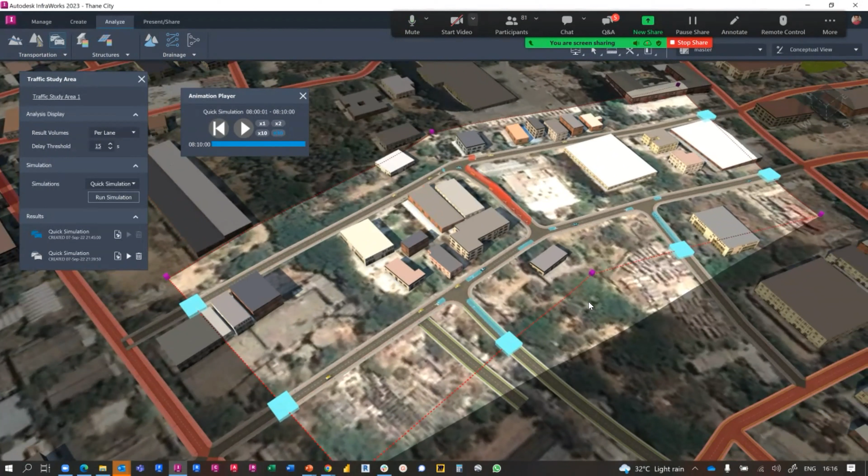So that's just a quick way for this webinar. We wanted to showcase the depth of traffic simulation that's possible within InfraWorks, and give you more things to think about as you think about your next project. And we would love to see you try this out and reach back out to us if you want to capture any particular nuances of your project. We'd be happy to help you with it.

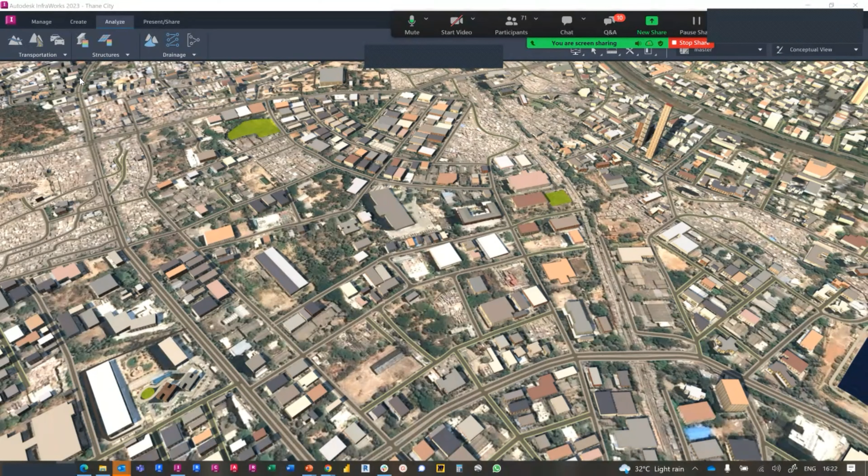So whenever you create this, this is the base map or base 3D model that gets created for you. What you're seeing is Thane city, that's where I'm from. I've just created all of this based on raster imagery and terrain data. You have these elevations and randomized building placements based on the raster imagery, so the algorithm kind of generates this. Of course it's not going to be 100% accurate because the imagery is relatively old, and new construction, new buildings, new roads keep forming.

So all of these existing roads that you're seeing are what we call - there are two types of roads that we have. We have our normal roads, and then we have our design roads, which are called component roads. The moment you convert this default planning road to a component road or design road, then we can make changes and design that. Let me just give you an example: let's say this is a planning road, and I just change it to a design road. Now if I design a junction here, you see the entire profile, the entire alignment, the horizontal and the profile, and the points of curvature are now visible. That's the difference between the planning road and the design road.

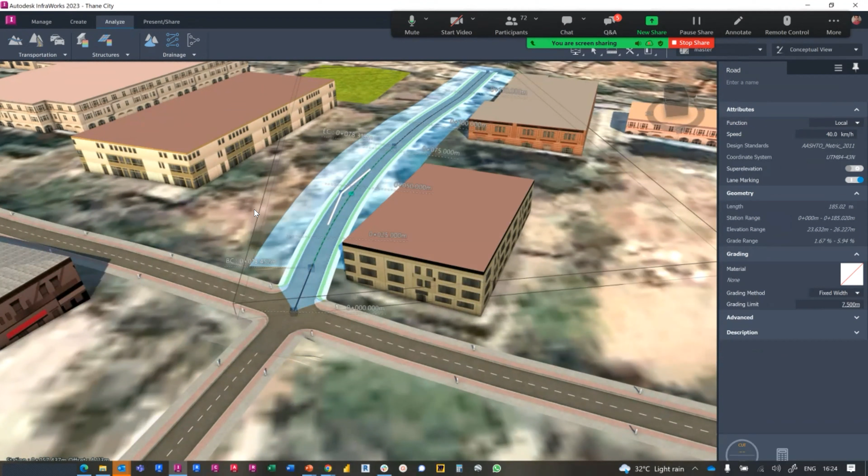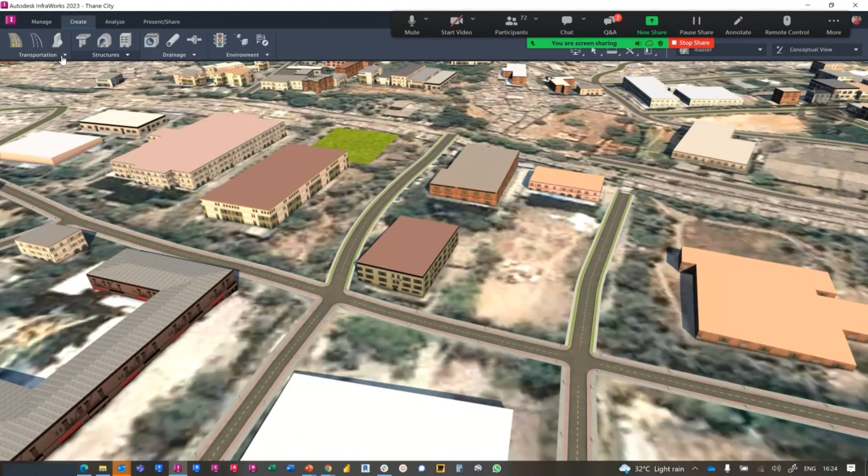And if I want to add another road at this junction, I can certainly do that, if that was the question. If the question was something else, I'd love for you to write a follow-up, but it wasn't quite clear. So let's say I'm putting another road between these two, maybe extended beyond or something - it will automatically place the junction at that particular road. Now what has happened here is the elevation of these two roads is probably not matching, therefore it's not created that junction. So there you go, it will automatically place the junction. The design of this road is in conjunction with this.

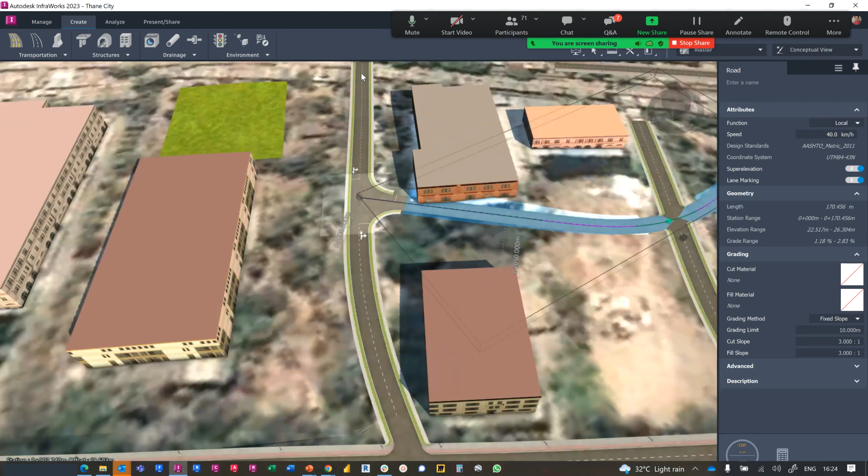And now whenever we run a simulation, it will automatically take into account the demand zone from here, the vehicles moving on this side or taking a left turn over to this side. I hope that answers the question. Yeah.

There's one more question, Tanmay, for you: the existing road design - will it also be captured and reflected, like road humps or drains etc., as it's a major impact for traffic? No, right now this is not taken into account.

Yes, actually what I can relate - with the help of InfraWorks, we can capture the road alignment depending upon the raster imagery. It will try to place a road, but it was not taking the actual design conditions over there. Correct. So the thing is, it takes into account the speed of the vehicles - if you know that this particular road has a lot of bumps along it, you can change the design speed of that road, and the vehicles will move at a lower speed, and then you can still be able to simulate the real world conditions.

One more question: can it incorporate the psychological process that if there is traffic on one road, people start moving to an alternative route?

Yeah, so that's the thing you have to design. In your demand matrix, when you say vehicles are moving from one demand zone to another, you have to anticipate that if a queue is forming at a particular junction, cars are going to move into another one.